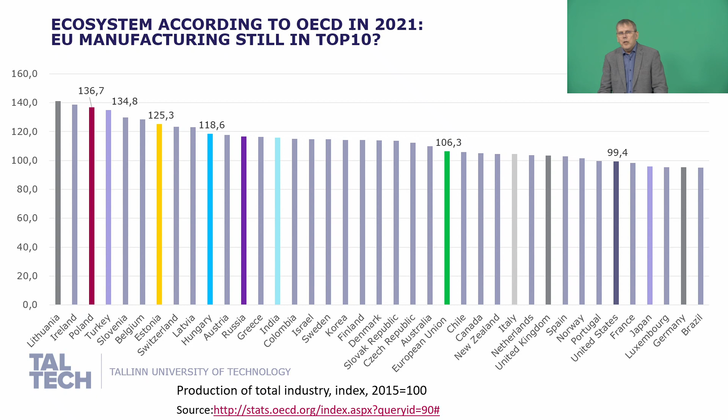If we look to the whole world, we can see that some countries are doing better than others compared to 2015 as a reference year. At the very top, we can find Poland, Turkey, Estonia, Hungary, our project partners here, and compared to the European Union average, we're doing much better. On the other side, at the end of the list, we find Germany, Japan, France, United States, the old countries whose economies are not doing so well regarding manufacturing. Maybe one solution is that new EU members and potential EU members are more initiative in digitalization, and Industry 4.0 as an Industrial Revolution has made a great impact in those countries.

If we look to our university campus, you can see actually a lot of small robots delivering food, pizza 24/7. This technology is also part of the Industrial Revolution.

If we look to the previous industrial revolutions, Revolution 1 was steam engines, Revolution 2 was electrical engines, Revolution 3 was computers. The first computer numerical controlled machine tools were developed in 1947. And now it's time for Industry 4.0. It means that we use a lot of digital information to control machines and to link machines into one system.

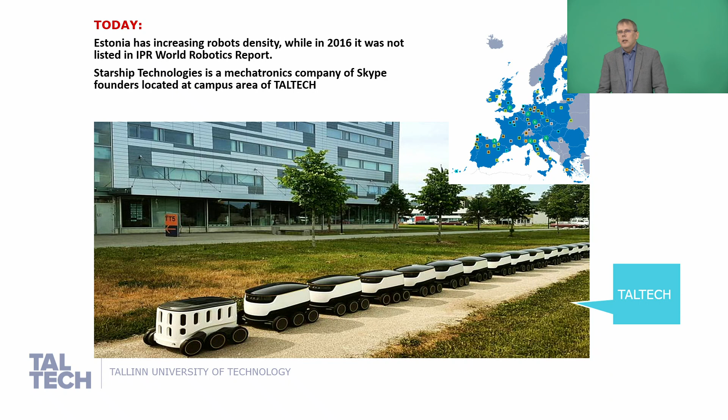If we look to the future, there is such kind of chart, a hype cycle for emerging tech. You can see that there's a digital twin of a customer. You can see a lot of AI. You can see industry cloud platforms. So these are promising technologies which need to be implemented yet, and maybe they succeed, maybe not.

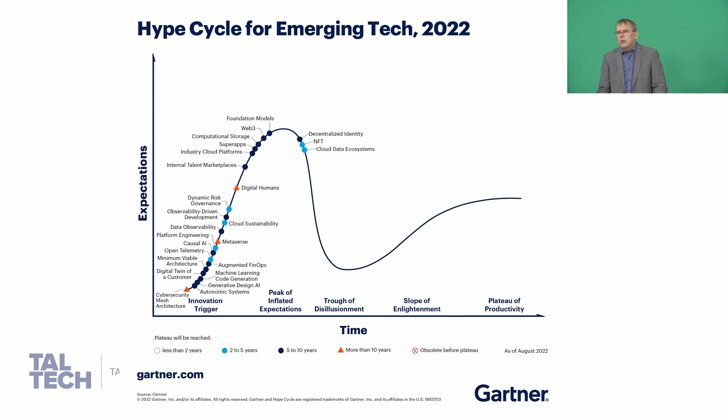Once upon a time, 3D printing was also at the very beginning, in the innovation trigger. Today, 3D printing is already implemented and it lies on the plateau of productivity, so it gives real benefit for the companies.

To simplify this picture, Industry 4.0 involves 3D printing, but not only. It also needs virtualization through virtual reality and augmented reality. It needs cybersecurity to protect the 3D printers. It needs advanced robotics to deliver the products. It needs industrial IoT to monitor the devices.

These devices produce a lot of data, and Excel is not enough. We need big data analytics. Also, simulations help predict the behavior of production in different situations. Cognitive computing is a new type of computing, and it's based very much on cloud computing.

If you look to the global IT companies, they are relying on cloud computing as it is safer and accessible all over the world.

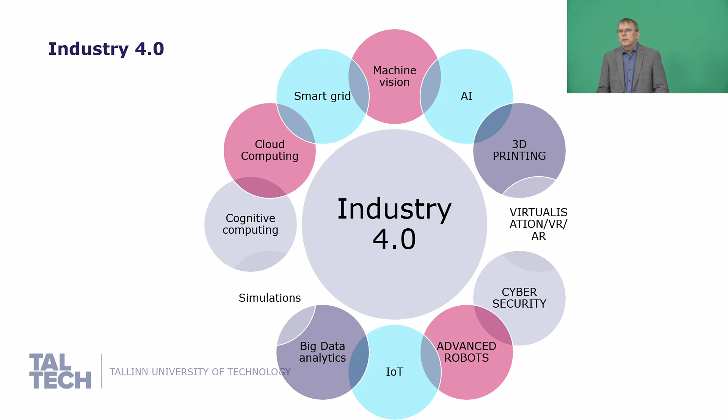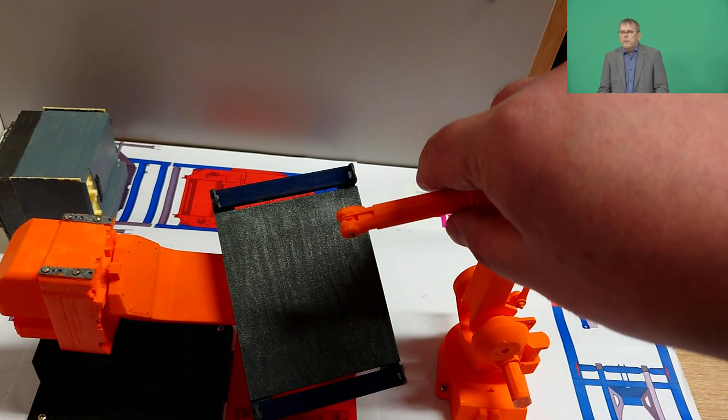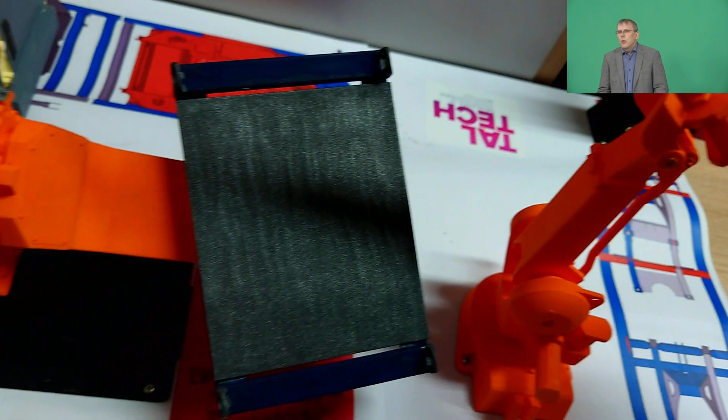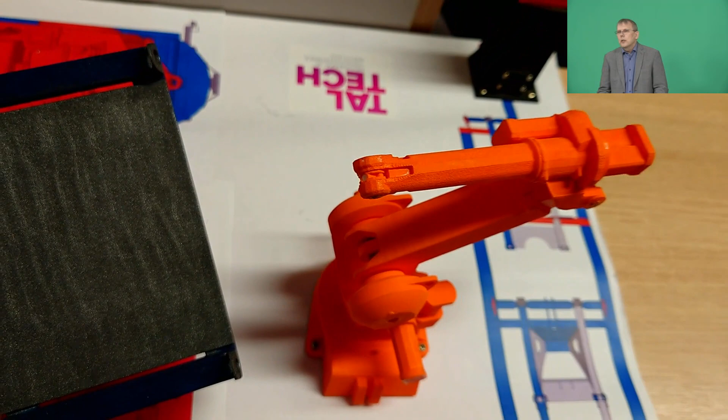Here you can see one physical twin. It's a 3D printed version of the production cell, and it gives a good overview of what kind of production will look like in reality, in a small scale. However, today it's also possible to do a similar thing using simulations or combined with augmented reality. Anyway, you see that those robots and machine tools are 3D printed, so it's a technology which helps you quickly solve problems and save a lot of money in planning.

I recommend looking at Industry 4.0 as an integrator of different tech. We can integrate self-driving cars. It's a new trend, but they also use a lot of 3D printed parts.

Industrial robotics is a changed area. We can see that collaborative robots, or cobots, are increasingly everywhere. This means that we can work together with humans, but also that robots need grippers and other parts which are easily manufacturable through 3D printing.

Digital twins means that we make a twin of the physical machine, which enables us to control it over a distance. Smart grid means that we can monitor energy consumption and regulate it according to the price of electricity.

Predictive maintenance, or industrial IoT, means that we can check the work of machine tools and check whether they need maintenance or not yet. So we avoid regular checks, but just predict whether maintenance is needed by the book, or it can be done later, or vice versa, much earlier.

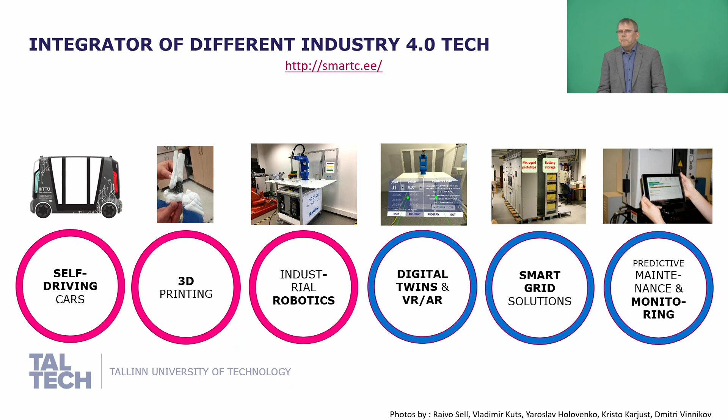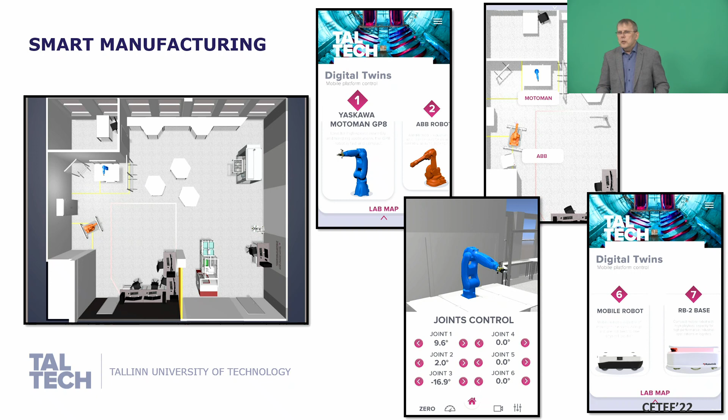Here you can see smart manufacturing. Actually, it is manufacturing in your pocket. It means that the production manager can take a mobile phone or tablet and look at the factory, and also control the machine tools if needed from a distance, being on the plant, in his office, or on vacation on a Caribbean island.

If we look at the longer perspective, we are in the area of digitalization. It means that digital technologies are helping humankind to survive and to be more effective.

Also, we can see that circular economy is more and more important. Looking at additive manufacturing or 3D printing in the scope of circular economy, we can see that reusing of powder materials, for example, is more eco-friendly than conventional technologies like metal milling or plastic milling, where we cannot reuse the material immediately.

And if you look after 10 years, we can see that bio-based systems are coming. In 3D printing, it also means probably that we can also print something for humans, biological materials.

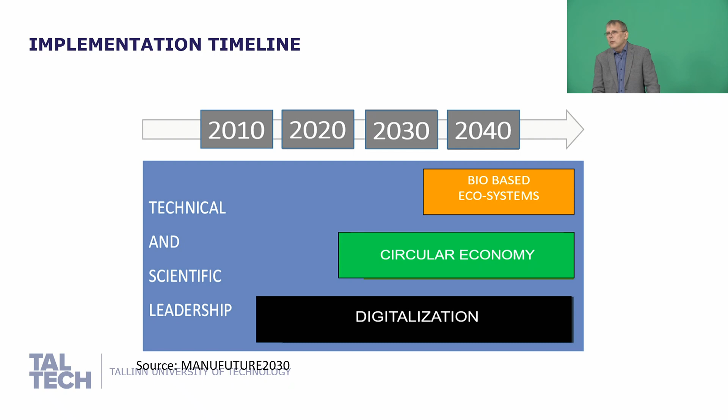Here is one example or case study from Estonia. We have purchased a metal 3D printer for Tallinn, and a computed tomography machine, which by X-rays enables quality checks for the 3D printed parts, is located 185 kilometers away.

So to put those machines to work together, we also developed digital twins. So it's possible to control the machines and look at their work as a production unit, and it doesn't matter that they are in different cities, far and away.

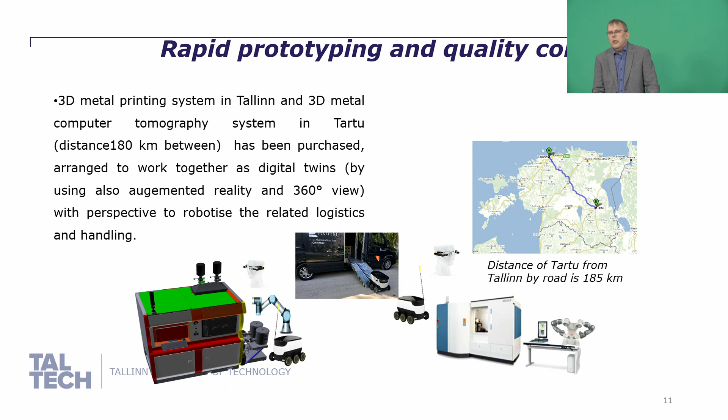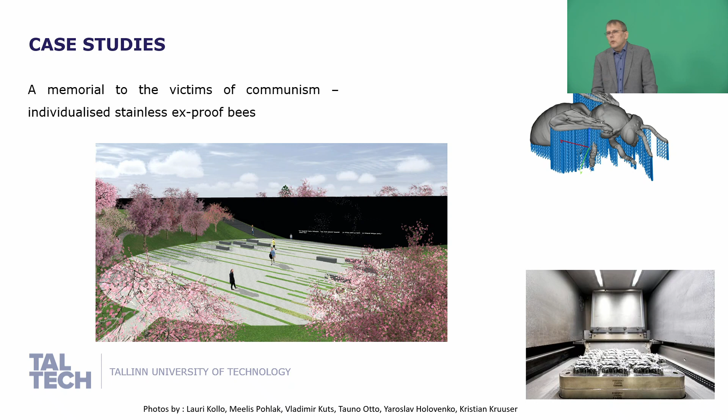Here are some examples of using 3D printing in art. There was one monument for the victims of communism, and artists wanted to see there more than 20,000 metallic pieces. It turned out that 3D printing was the cheapest available technology, allowing for such precise pieces and such an amount of work.

And here you can see the 3D printed versions in stainless steel. Nevertheless, they can be broken, so from time to time we manufacture the repair parts. But still, this technology is very viable compared to old forming technologies.

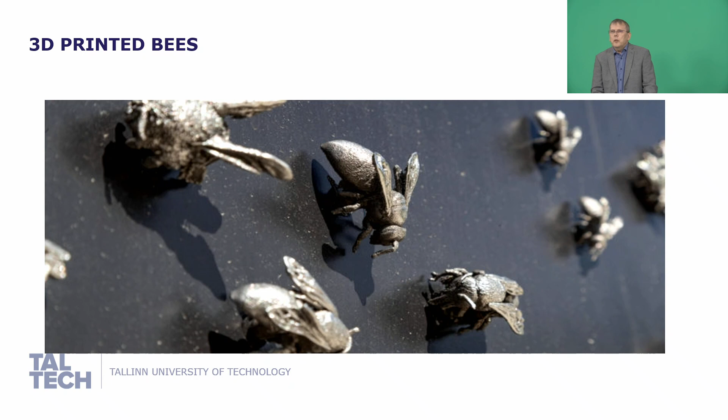Also, we have used 3D printing for smart wearables. For example, if we need to check the health condition of an operator who is operating machinery in difficult conditions, we can print out wearables and put sensors on them. So it's possible to monitor breathing, temperature, vibrations, and the activities of the operator or worker, and it helps to make production safer.

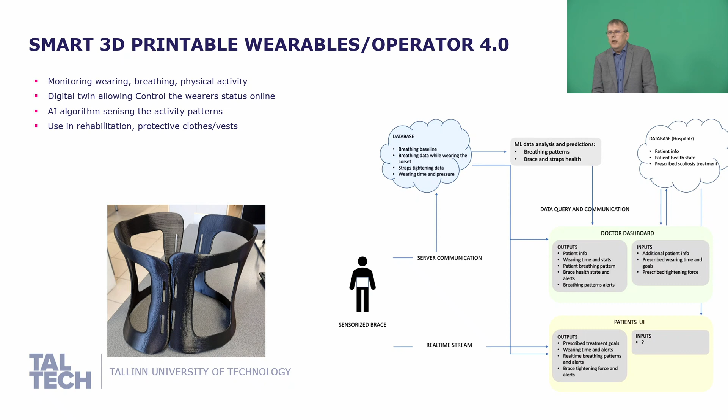For example, a lot of IT guys who are using computer mice extensively complain that their hand is not handling the mouse well anymore. Such 3D printed orthoses help a lot.

For example, before dangerous operations, such as on bones, it's possible that from medical computed tomography, human bones according to the person are made into 3D models, and we can print them out. Then it's possible for medical doctors to look at the situation and make the surgery plan more precisely.

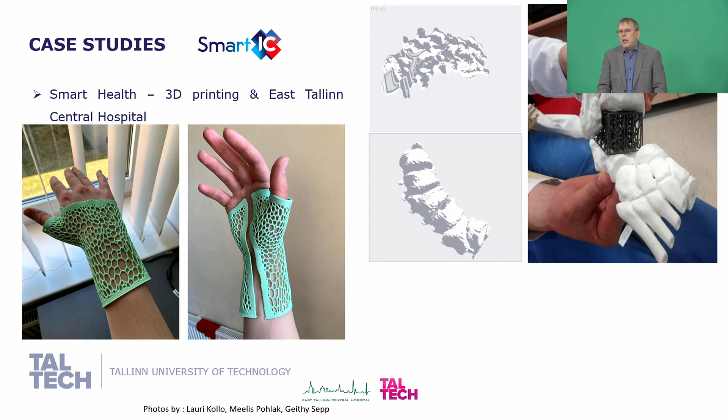Also, maybe it's good to know that 3D printed electrical machines are a new trend. If we look to the future, in 2035 it's expected that car manufacturers will produce only electrical cars. Today, electrical cars are quite expensive. If we look at the technology, 3D printing making it possible to print out electrical machines might also positively influence the prices, making electrical cars more affordable for us in the future.

So you see, digital technologies like 3D printing are part of the Industry 4.0 revolution. We see that it helps us survive, save energy, save the world economically, and also be more eco-friendly.